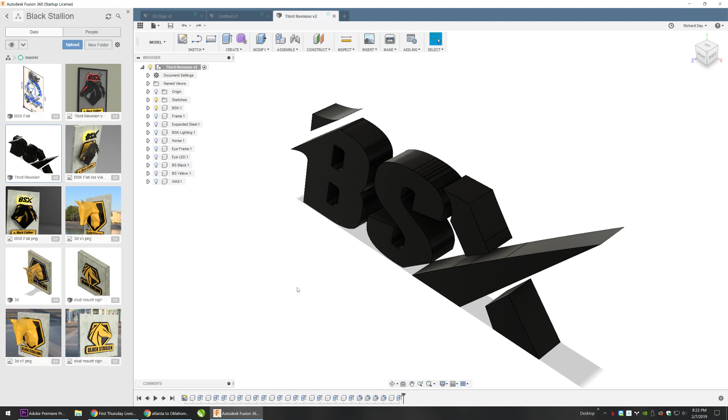Yeah, if you guys want to see some of what's coming up, you got the live preview over here. I'm going to jump into Fusion. I'm doing this sign for Black Stallion that is... this is ultimately... oh, now it's going to open in a separate window. Damn it. We went through a bunch of revisions, so this is ultimately what we ended up with. It's going to be a pretty cool little project.

They're coming out with a new line of gloves, and I already wear Black Stallion gloves. I have a set of Tillman gloves that I don't use very often because they're more TIG gloves than anything else. At FabTech, DeWalt actually gave me a set of their welding gloves, and I really like them.

But the problem is they're fairly thin, so they're really good for running around and tacking things together, but when you actually get into long beads or your hands are next to the arc, they're not awesome in that situation. And then I have a set of Black Stallion TIG style gloves that are a little thicker than the Tillman or DeWalt ones, and a set of Lincoln and Black Stallion, more MIG and stick gloves, the heavier type. I'm not really a big fan of the idea of one glove to wear for everything, because there's different situations.

If you're fabricating - and I get slack for it because sometimes I'm not wearing gloves in videos - that's mostly because I'm working on little pieces and you don't have the dexterity you need with gloves on when I'm tacking everything together. But when you go into full welding, I'm pretty much always wearing gloves because I don't want to get burned. So that's the Black Stallion project, and then I've got... what's the other one?

I have this neighborhood sign that I'm doing, and this one's going to be pretty interesting when it's all said and done. It has an LED backlight. Let's just do the render while we're sitting here, why not?

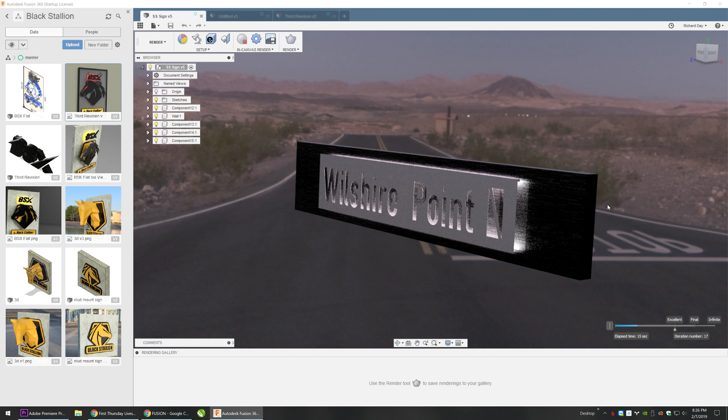It doesn't render real well because it's going to be a shiny piece of metal, so it always washes out the render. But this is one thing that I do: if you guys are in this sort of business where you're making custom stuff, especially high dollar custom stuff, it's really helpful to be able to give a customer a realistic photo render.

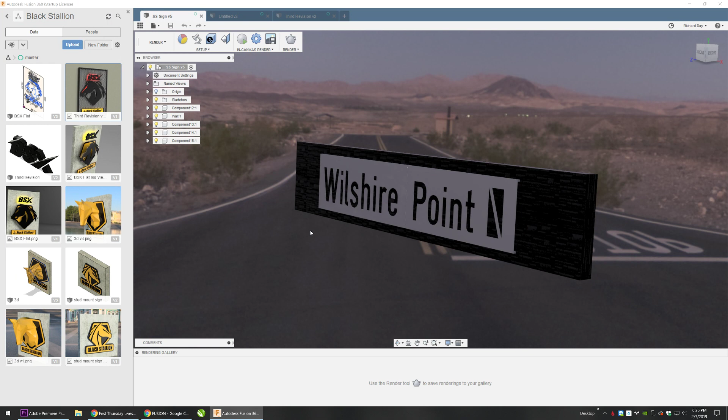The only limitation with Fusion is there's not a lot of different default textures and materials, and there's only like 8 or 9 backgrounds. What you saw there is like a valley background, but it's the only one with a road in it. So if I need to show somebody something on the side of a road, I'll normally line it up here.

They changed with the newest update the way that the pivoting mechanism works. But anyway, I can show somebody a half-ass version of what that would look like on the side of a road.

It really helps drive the sale at the end of the day. You can look at drawings all day, but when you can see something where you can actually see depth, that's a big help. Especially if you can get it all photo pretty like this Black Stallion one - that's just a photorealistic render, and that's not even like a very good one, but it shows how the light's gonna look and everything, so we're good to go there.

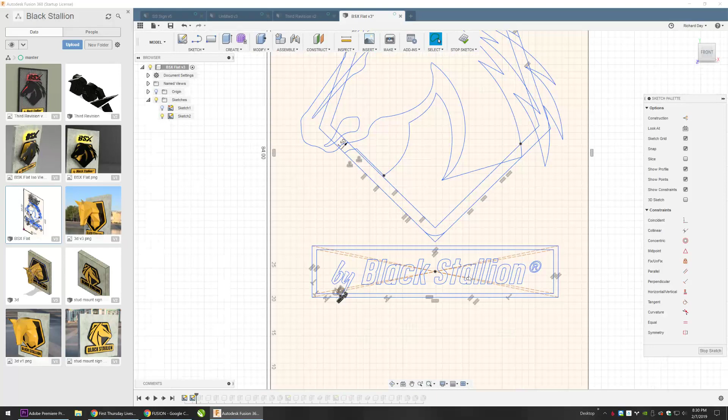Okay, so with Fusion, this is called a sketch, and the sketch is basically a 2D drawing where you lay everything out. I can go in here - this was a file they sent me the graphic, and I've laid everything out from that. And then you build up off of that sketch. So, stop the sketch.

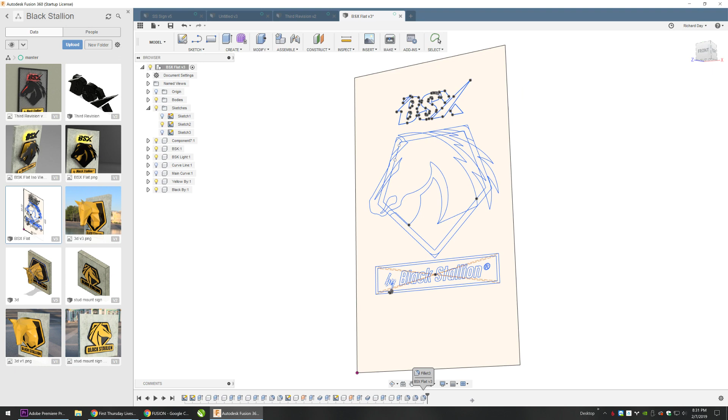So one by one, you build up all the pieces. Oh, this wasn't even the right one. This is the one I need.

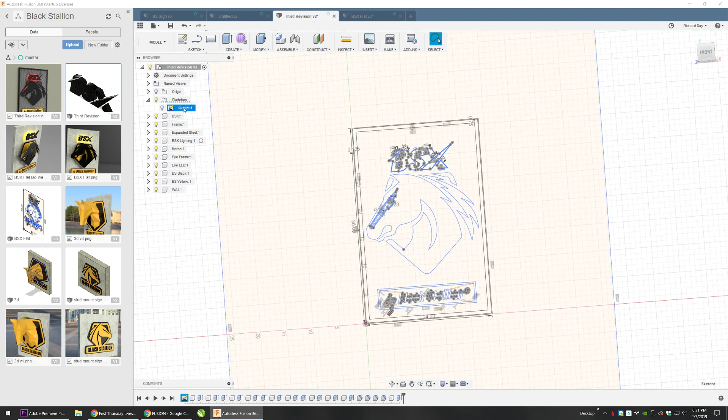I've got all the components hidden. Let's see, there we go. Okay, so we'll jump into the sketch. There we go, there's the sketch.

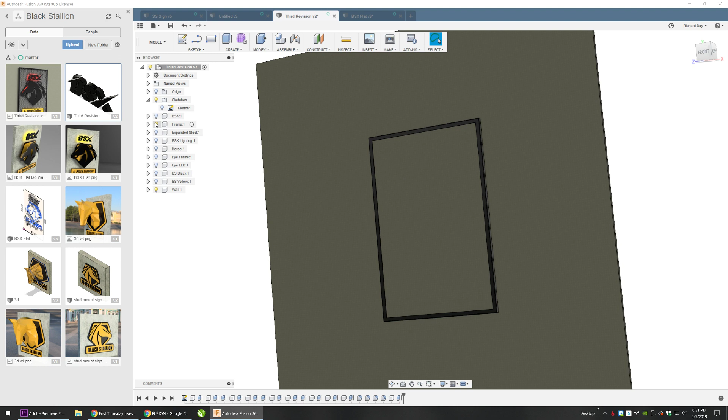So once you've finished your sketch, you would extrude out all the components basically. There's not too much more that I'm doing here. We've got the wall that it's going on, then a frame and the expanded metal, and then it's basically just add the letters. If we zoom in here, you can see how they work, sitting off of the background.

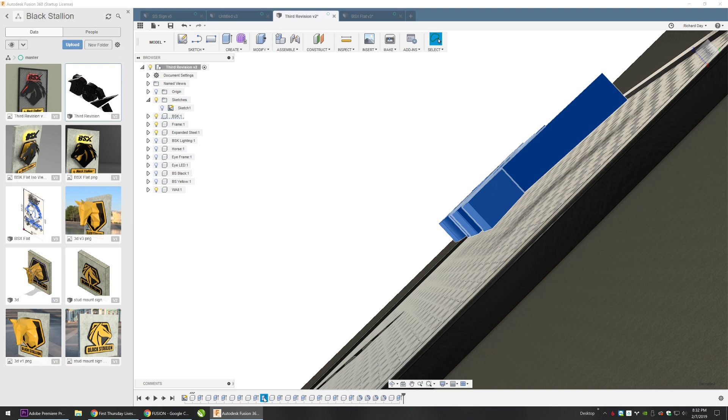Okay, so this is the command to extrude them, and I'm hoping that shows up well enough. But basically, you can see on the sketch, I've selected all the faces, and then it's an offset because I want it to float up in the air like that. So the offset jumps you off the sketch page, and then down here I have a distance, which is a thickness, and then under operation you'll normally have join or cut, intersect, new body.

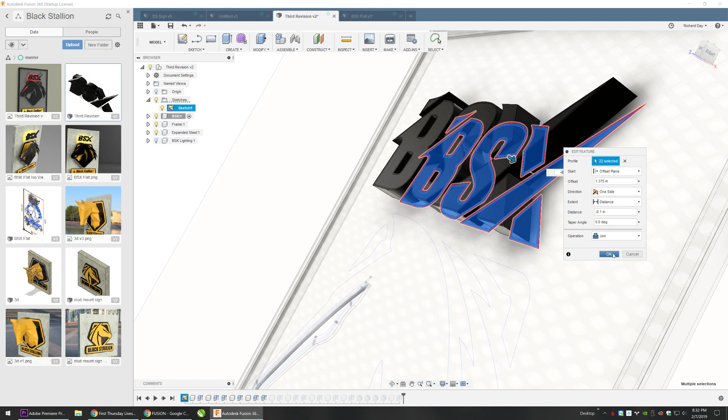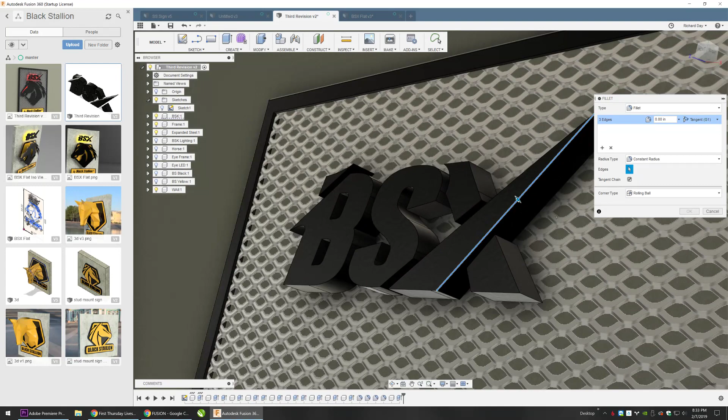Or new component if you're making a whole new shape. And that's basically it, you build it up that way, and once you've got it the way you like, in this 3D space, I could go in here and do a fillet, which is just the F hotkey. I could grab this line here, and if it were the way I did this model, this triangle isn't treated as one whole body, but normally it would be. But you could just grab this and roll that fillet.

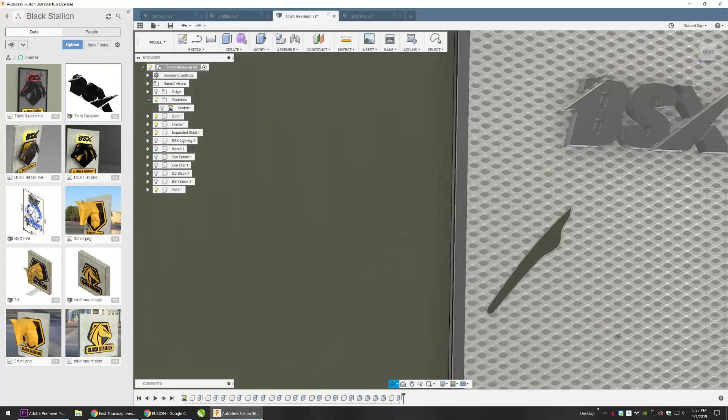Let me move the camera. And this is where Fusion really jumps ahead of SketchUp, is when you want to do fillets and whatnot in SketchUp, it's a pain. So SketchUp is really good for flushing out an idea. All right, I'm done with that. SketchUp's really good for flushing out an idea, but if you want to go up to a photorealistic render and get all your fillets right, that's where it starts to just become a nightmare.

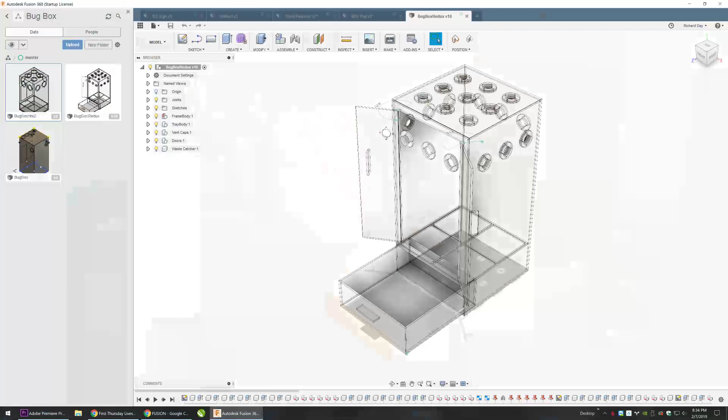And I'll actually open up one more that kind of shows off exactly the big benefits here. So I actually got hired just to build this, just to make this model for a guy. And this is like an insect cage.

He didn't know exactly what he wanted, but he physically had a cage, and he was like, I want this modeled, but I want to be able to change things.

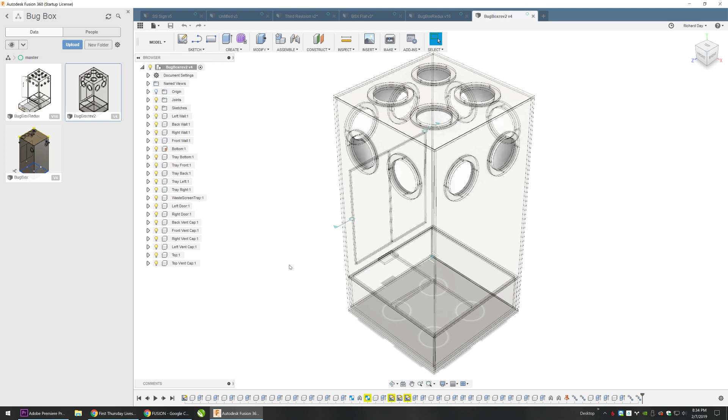So I basically made this model. Over here on the left, there's all these different parts, and then there's actually a motion control setup. So if you grab right here, grab the door, you can open the door and close the door. You can open this tray and it'll only let you open it as far as it would go in real life.

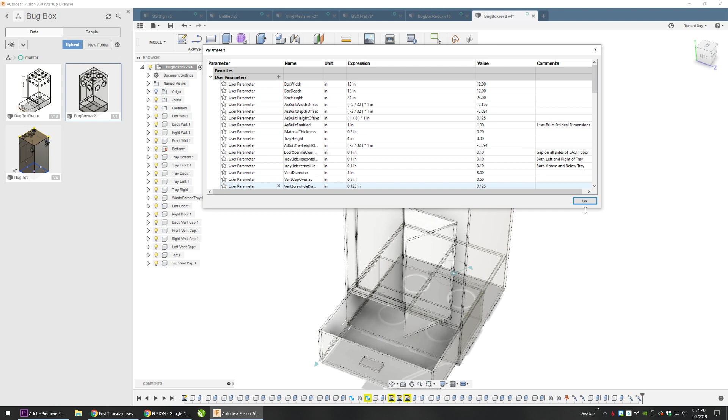But one of the really cool things about this is everything's parameters can be defined in formulas, this is where Fusion just jumps ahead of SketchUp. So I've got this parameters window and I'm going to move it off screen. But one of the options here is how many... oh come on, where is it?

Vents per side, see there's 2 of these holes on each piece. So if I just change that to 3, it auto updates and it broke it because they're too big. But then I can go to vent diameter and change that to like 1.5, and it will just iterate throughout and everything's there. So if I wanted to make the box width right now is 12 inches, let's say.

And I just totally broke everything, didn't I, by using my number pad. All right, I'm back. Thank you, Ronald Boy. Appreciate that, Ronald Hot Boy.

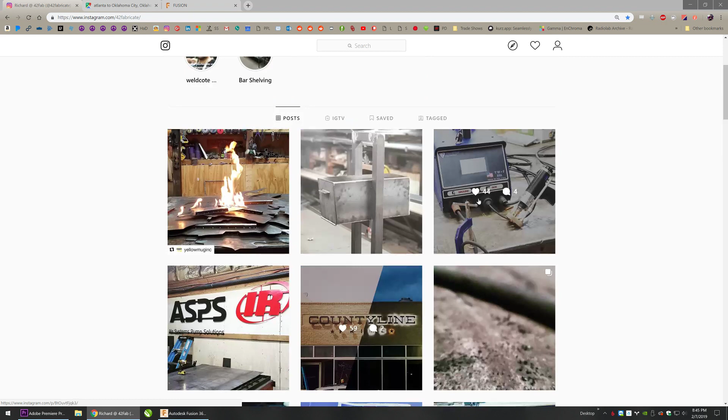Then the last thing before we wrap up, unless anybody else has got anything they want to bring up, one cool addition to the shop has been this TruWeld stud welder. If you guys have never stud welded, I'm gonna have to pull up a video because it's so cool. I just laughed like a little child when I was using this thing.

A stud welder basically takes a piece of threaded rod that has a profile cut into it. I'm sure these are punched or something, but it looks like something you could do on a lathe if you had the patience and knew what to cut. At the end of that profile is just a little dot, a divot or protrusion, and that presses down on a sheet of metal. Then the stud welding gun, when you activate it, lights the arc, retracts, and then drives the stud home. As I understand it, it happens like that.

That gets everything put together, and that stud is welded along that face, not just around the edge. As I understand it, it's because the arc starts at that little divot in the center and then spreads out. I've done like a dozen of these as test pieces and tried to break the weld, and every single time the stud breaks before the weld does, which tells you they're as strong as they're going to be.

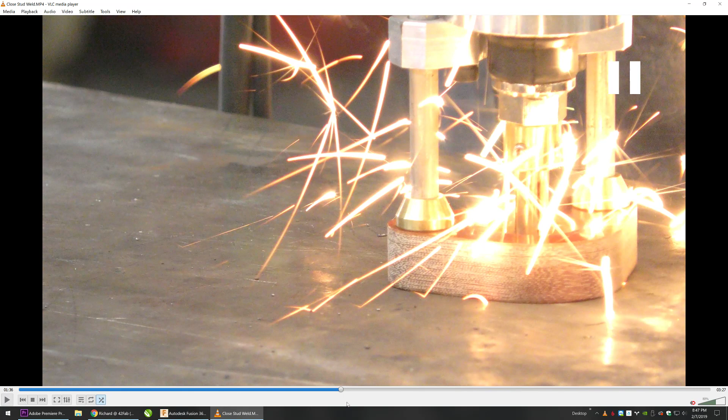There we go, all right, let's play that. So you see, you just put the gun down, and boom. Now let's get some audio in there.

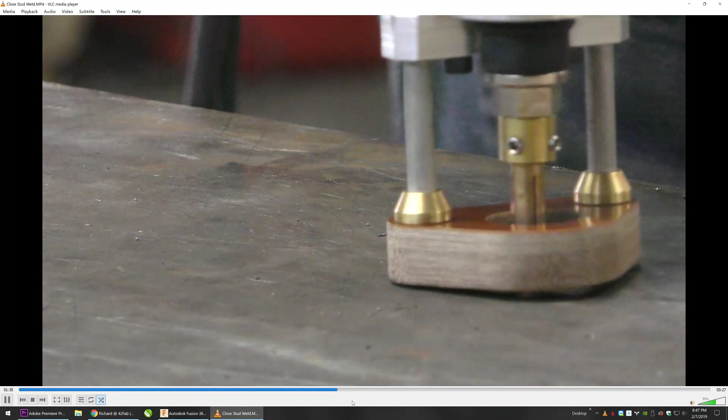Bam! It's just like that, and it's welded. Yeah, so that's a quarter-20 stud, and that's not even a high quality stud.

TruWeld Stud Welding sells a whole line of studs, and they sent me some samples. I was trying out some other ones I had, and looking at them it's very hard to tell a difference, except the geometry is a little different, but they were leaps and bounds above.

So I am going to be working with TruWeld to come out with something that can add to your business if you're a sign maker. Really any sort of welding this can add to, but if you're not needing protruding studs every day, it's hard to justify a purchase. But I have some unique tricks up my sleeve on the sign making side, so we're gonna make some cool stuff together.